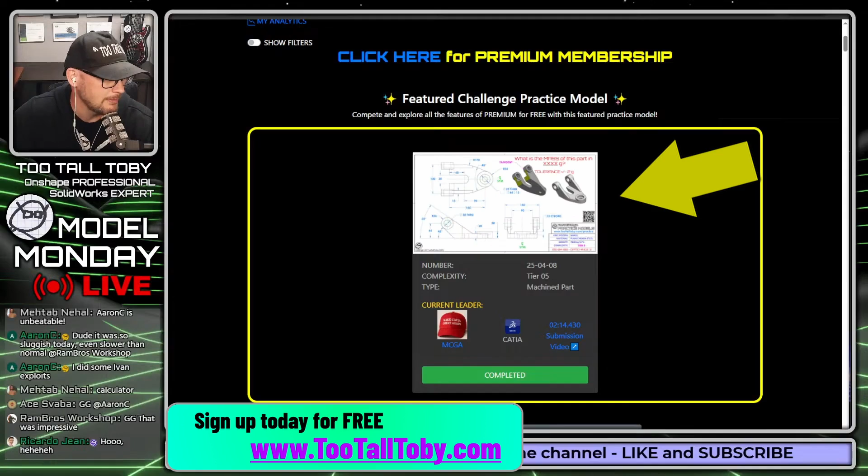You're going to see here we've got this featured practice model from last week. We posted this one. We made it a featured practice model for last week. Well, now we are going to refresh the page, and you should see a brand new featured practice model here, 250503. And so with the release of that brand new practice model, you guys are trying to solve this model on your own live. I am going to try and solve this model here for you as well using Onshape.

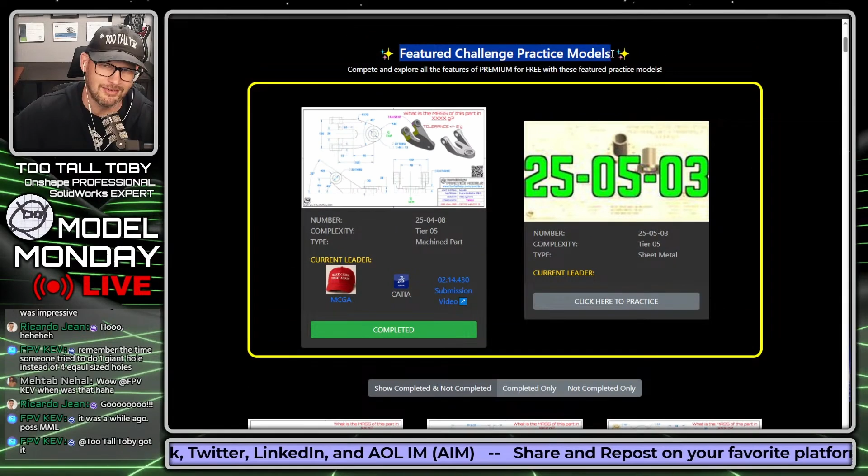And we're going to access this model by going to tootalltoby.com, saying click here to get started. And we're going to try and do this model right here. We just released it 10 seconds ago. 250503, and it's here in our featured challenge models. So these are models where all users, even if you have a free account at tootalltoby.com, can access the functionality of practice models premium.

So normally this model is gated, but today it is available for everyone, and it'll probably be up there for about a week. So we're going to say click here to practice, and no one has solved this thing yet because we just released it. So let's say click here to begin, and go.

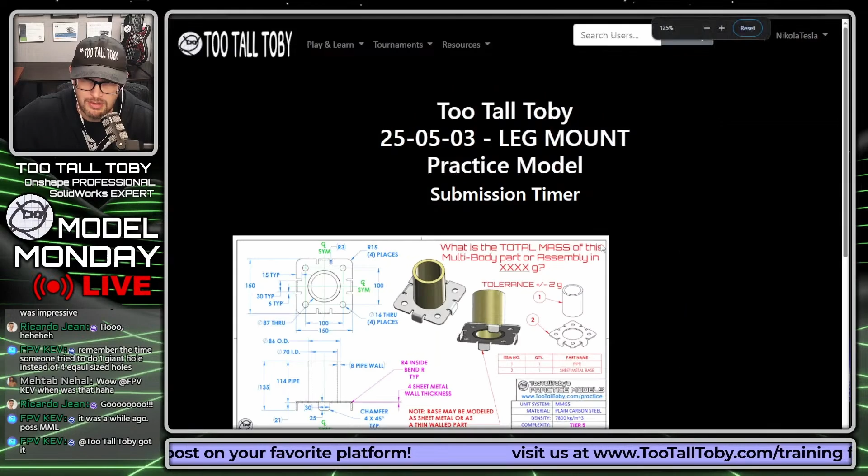So what is the mass of this multi-body part or assembly in XXXX grams? Tolerance is plus or minus 2 grams. So both of these parts are made from plain carbon steel. We can see the clock is running down here, but even though the clock is running, I think it's always good to start out by coming up with a game plan. So one of the first things you're going to do is you're just going to kind of get acclimated with the geometry of the drawing, right?

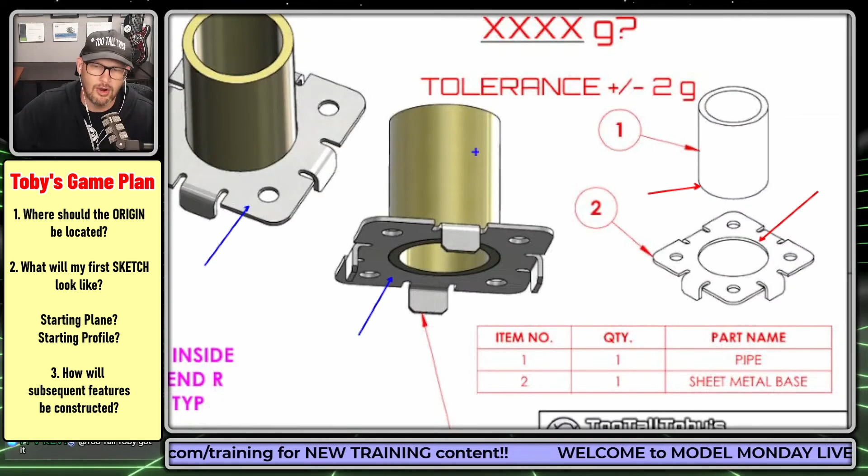If somebody from the shop gives you a drawing, or if a customer's got a new invention and they give you a drawing, you're going to have some questions like, when this pipe fits into this hole, are they the same size or are they different sizes? And is this pipe here flush to the top surface of the bracket, or is it flush to the bottom surface of the bracket? And are they made from the same material? Well, we already kind of answered that one. They are made from the same material. They're both made from plain carbon steel.

And maybe another question you'd have is, is this lower part sheet metal? Does it have to be sheet metal? Well, we can see here there's a note that says the base may be modeled as sheet metal, or it may be modeled as a thin-walled part, whatever you prefer. I'm going to do it as sheet metal in Onshape here.

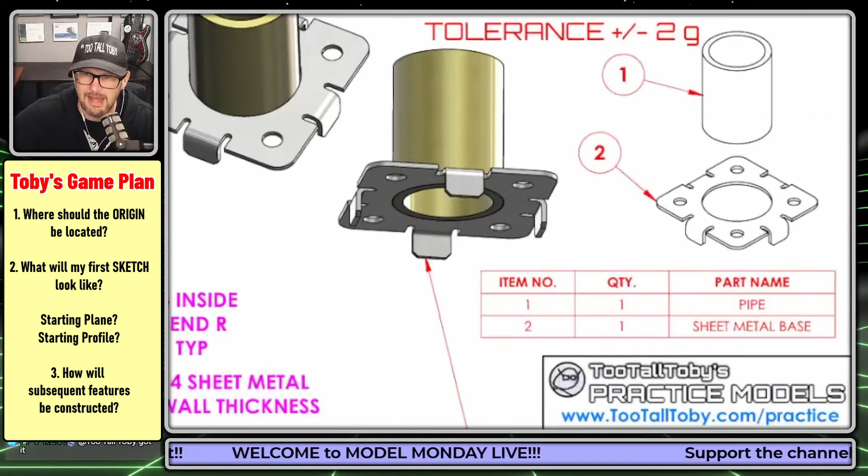So now, if we go back to this first question here, which is, is this diameter the same as this hole? Well, if we look here at the top view, we can see that there's a call out on the top view for the hole at 87 millimeters through. And then there's a call out for the pipe just below that at 86 outer diameter and 70 inner diameter. So now we know that there is a 0.5 millimeter clearance per side. So 1 millimeter total for that diameter clearance for that pipe to move through.

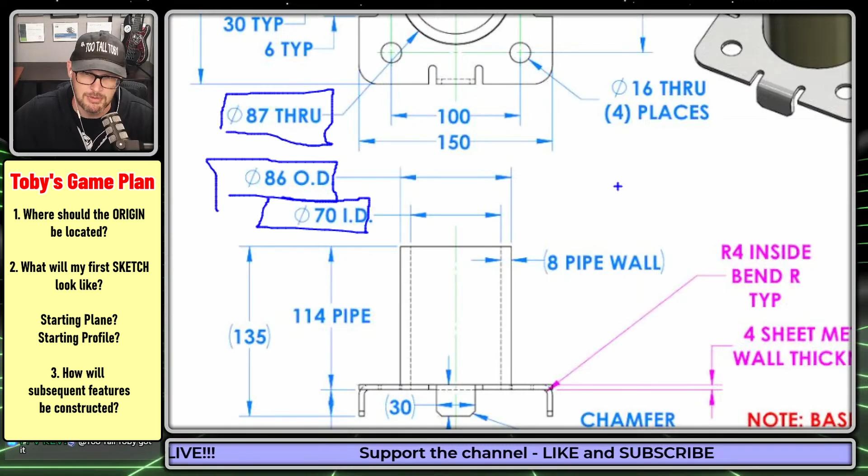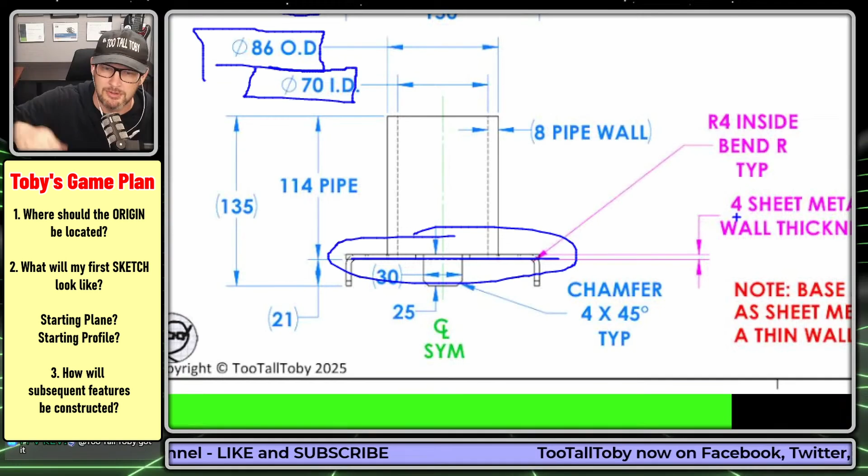And then is the pipe flush to this bottom face? I think it's safe to say that it is. You can see here that it looks like it's running up flush to that bottom face of the bracket. So not the top face, but flush to the bottom face. And then also, if we look here in this front view, we can see that there's no extra line happening down in this lower region here. It's like there's one single line that just kind of comes across straight there. So that's another indicator that that pipe is just moving down and ending up flush to that bottom surface.

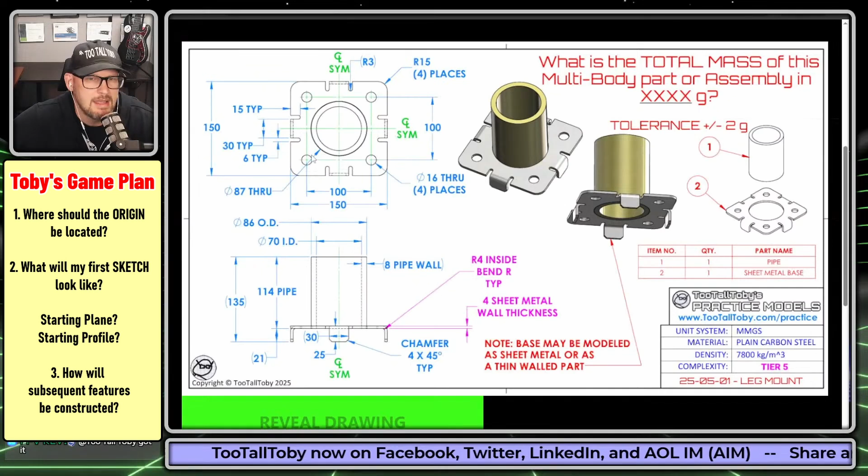So that acclimation has to take place whenever you're looking at a semi-complex drawing, a drawing of a multi-body part or a drawing of an assembly. Whenever you get a drawing from a customer, you just have to take a minute or two and kind of get acclimated with the geometry of the drawing. So now we can get into our actual game plan. And I think the game plan for this, for me, is going to be to create this kind of sheet metal part first, and then I'll create this pipe part second.

And so to create the sheet metal part, I think what I'll do is I'll create a rectangle here that's centered on the origin. So we're always thinking about what's our first sketch going to look like and where is our origin going to be. Maybe I'll include this hole that's running through, the diameter 87 hole here, in that first sketch as well. And that sketch is going to be 150 by 150.

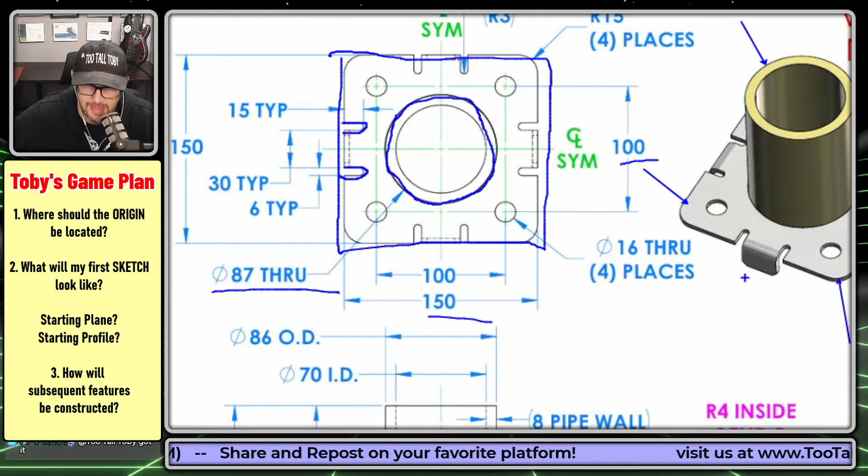And then I'll take that sketch and I'll turn it into sheet metal. I'll just make it sheet metal right away in Onshape. And then once I've got that geometry extruded as sheet metal, I'll go in and I'll create this shape here, this kind of like tombstone cut shape here, because that's going to give me the location of this flange that's sticking down here. So I'll make those cuts there.

And then once I make those cuts, then I can get in here and start creating the geometry of this flange. So we can see this flange is 30, we saw that in the top view, by 25. And it's got some chamfers here on the corner. And then once I've got that one single flange, well, then what I can do is a pattern.

This model is symmetric in two directions. It's a square base. So instead of doing this as a mirror of some sort, what I could do is a circular pattern. So we can take those cuts, and we can take that flange and we can make that into a circular pattern and just circular pattern that thing all the way around.

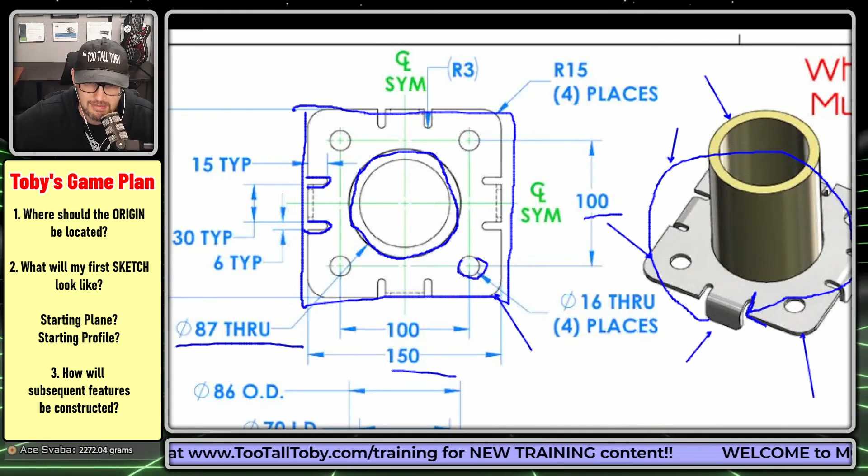And then once I've got that circular pattern, it's pretty much an easy finish there. All I've got to do is add these fillets, add these holes, and then extrude the pipe. And I'll make the pipe a separate part, and that should pretty much take care of it. So we took about 4 minutes there to come up with a game plan.

I see some people are coming into the chat with their answers. That's awesome. Maybe those answers are even going to start showing up in the top 100. And so we'll see that in a minute, but I'm going to save that. I don't want to spoil it for anybody.

So what I'm going to do is I'm going to jump into Onshape here. I'm using Onshape's free offering, onshape.com/free. And so that means that once I create this document, it will be created in the public space. And that means that anybody who wants to can go into the public space and search for this document name, and you'll be able to see the way that I constructed the tree here in Onshape.

Let's bring up our keyboard cam and let's get into modeling this thing. Create document, 25-05-01 leg mount, and this is in the public space, so anybody who accesses Onshape can search for this document. And we're going to go up here to this hamburger menu, and in that hamburger menu, we're going to make sure that we're using the correct workspace units.

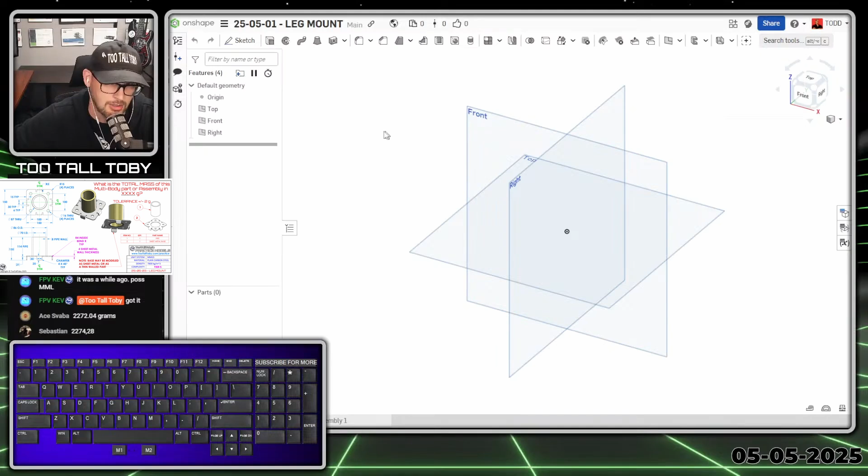So my default workspace units are millimeter. That's the units of this document. Grams, that's the units of this document. So I'm good to go here. Of course, if you want to change that, you can change that in your profile up here, your defaults, or you can change it per document using that hamburger menu.

And then I'm going to go top plane, begin a sketch, S key here, begin a sketch, N key to get normal to, S key, I'm going to go to sketch a rectangle. I'm going to single click here, I'm going to move my mouse, and then I'm going to hold Alt. So this is kind of a cool shortcut. When you hold Alt, what you can do is you can make a square instead of making a rectangle in Onshape.

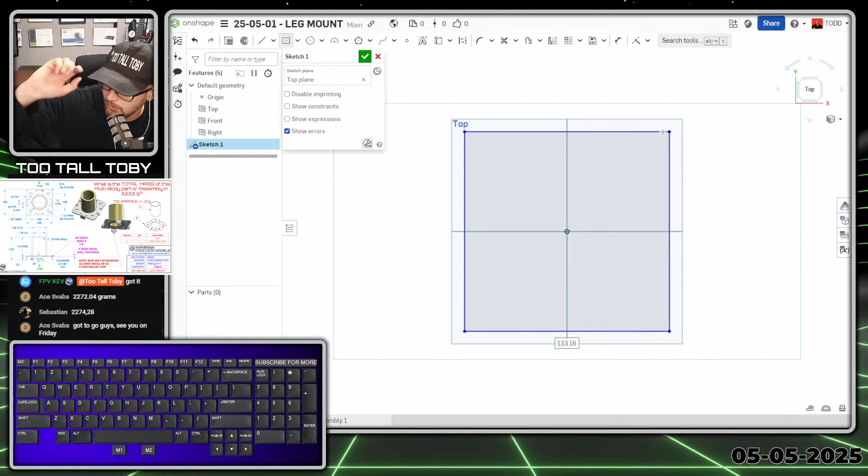So I'm holding the Alt key on my keyboard, then I'm going to click to drop that corner of the rectangle. Now I'll let go of Alt, and I'll type in 150, and look at that. That gives us a square instead of a rectangle. So now we are set up here with a square instead of a rectangle.

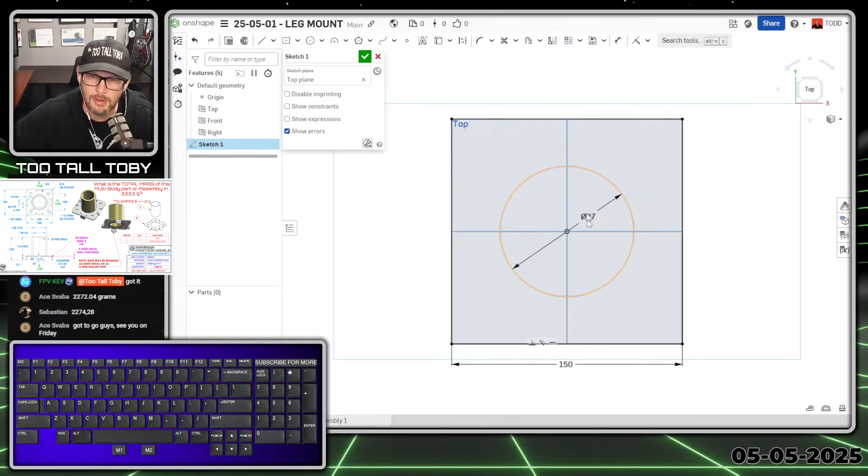Now we can press the S key, jump into the circle command, and we can create a circle here with a diameter of 87. The through hole in the sheet metal part is going to be 87 millimeters. And so now, whoops, I didn't mean to make that circle, just Control Z there. So this is what your first sketch should look like here. And now we're going to take that geometry, we're going to exit the sketch, and we're going to go into our Onshape sheet metal model tools.

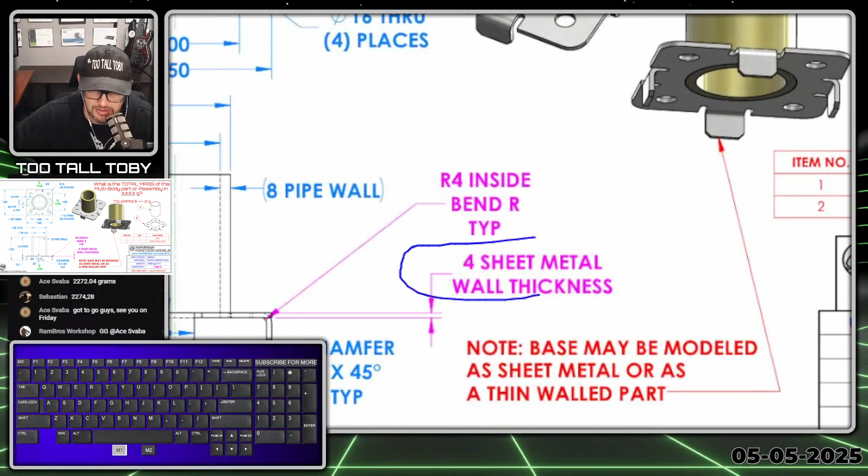And so here in our Onshape sheet metal model, we're going to say we want this to be a thicken, and then we can just pick here inside of this region, and that lets us thicken this into sheet metal. Now, if we go back and we look at the drawing, we can see here on the drawing that the default sheet metal wall thickness is 4 millimeters, and the default inside bend radius is 4 millimeters as well.

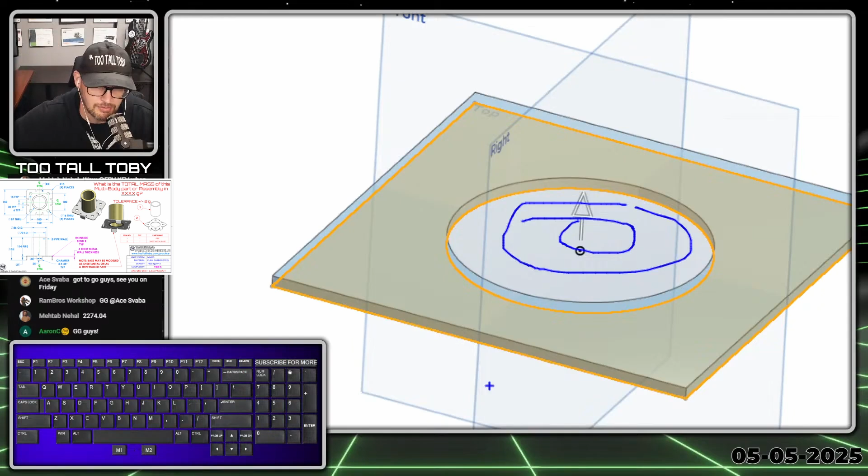So here in Onshape, we're going to make sure that we're using 4 millimeters for our wall thickness, 4 millimeters for our bend radius, and then this could either be going up or down. I think I'll just make this going up, and that way later on I can create the sketch for the pipe right here on the top plane. So it just makes it a little bit easier for me to make that sketch of the pipe later on. So 4 millimeters up here, 4 millimeters in this direction. I'm going to hit the green check mark, and there we go.

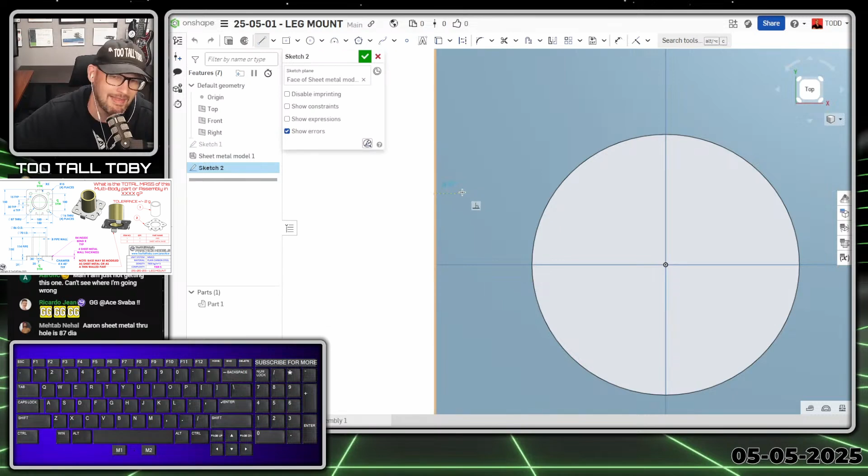And now I'm ready to move on to the second step in my game plan, which is to create those little slots on the side here. So S key, begin a sketch, N key, get normal to, S key, create a line. So I'll just do a line here. And we could do this with the slot tool, or we could click line, arc, line. Either one works. I like the slot tool here. So I'm just going to drop in a line, hit escape, click on that line, and then I'm going to go up here to where you've got the offset entities command in Onshape. You fly out this menu, and that's where you're going to find the slot command. So make this a slot here.

That's going to have a width of 6 millimeters. So 6, and then I'll just left click to finish that slot, and then I'm going to hit escape, and I'm going to right click on one of these lines in the slot, and I'm going to choose select tangent connected edges. So that gets everything in the slot, and then I'm going to click mirror, and then in Onshape where it says select a mirror line, I can just pick this plane here, the front plane, and I can just mirror right over that plane. So you don't actually have to sketch a line to mirror about. You can just mirror about that plane.

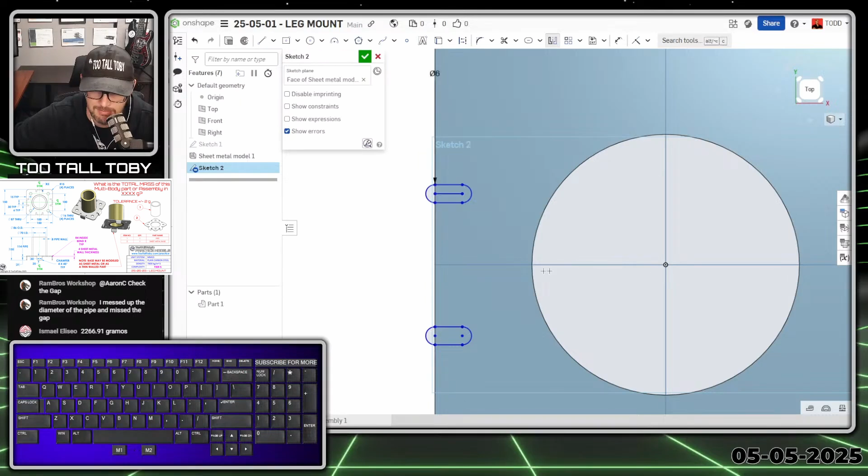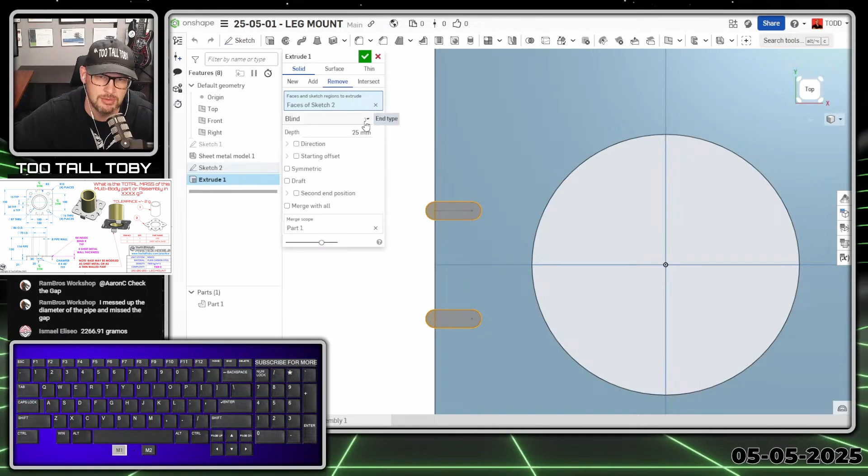And so now I can S key dimension and create a dimension here from line to line with a distance of 30. This is all shown in that top view. And then a distance here from this line to the arc, and that goes out to the max tangency point of the arc, and that's where that 15 dimension is shown. And so now I'm going to S key extrude, and this will be a remove, and that remove is going to go through all. And boom, there we go. That gives us that geometry.

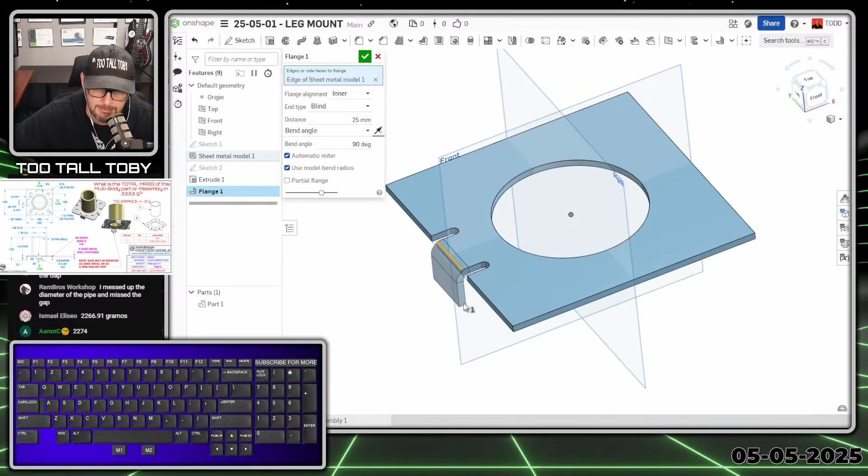And so now I'm ready to move on to the flange feature. So for the flange feature, I could just pick the flange command here, flange. So this is in the sheet metal fly out, all the sheet metal commands are here. So flange, and then I'll pick on this edge here, and you can see that I can reverse the direction of that flange. I can make sure that the flange is going down. It's going to be going down to a distance of 25, and then I'm just going to look at this thing in a front view.

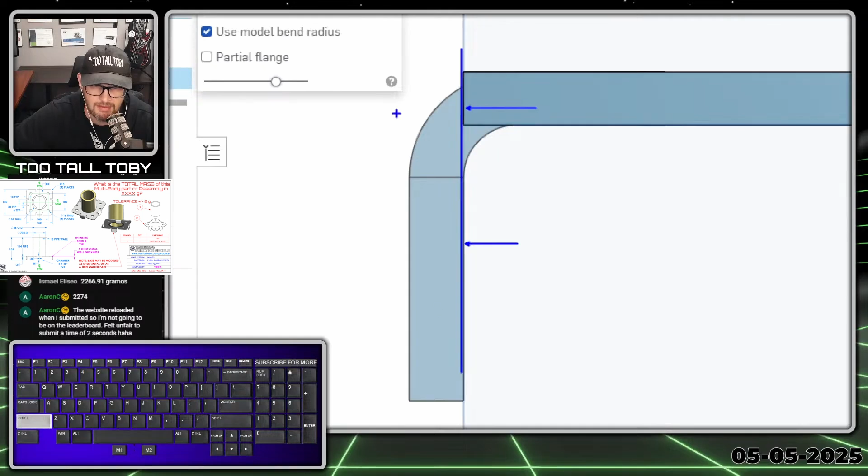So I'll press Shift 1, that rotates me into a front view, and you can see here that the edge of the part is coming down, and now we're ending up one material thickness to the outside of the edge of the part with this flange. So here's the edge of the part, here's the flange. Those two probably are flush, and then I've got one material thickness here to the outside. Well, if we look at the original drawing, that's not what we have. In the original drawing here in the front view, the edge of the part is flush to the flange.

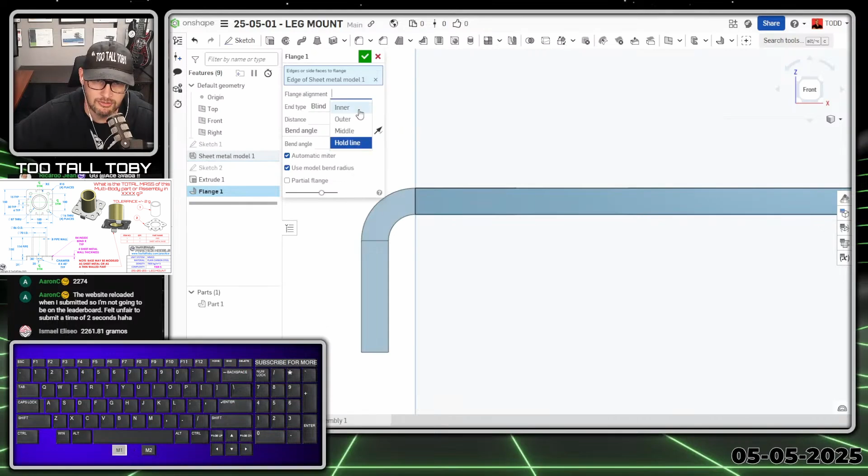So in any sheet metal module, whether you're using Onshape or SolidWorks or Fusion, you're going to see that there's going to be options to control where that flange ends up. So flange alignment inner, flange alignment outer, see, look, that one's flush, flange alignment hold line. You get all different results here. So for this one, we're going to say flange alignment outer. We're going to hit the green check mark, and then the distance from this face down to this face down here should be 25 millimeters.

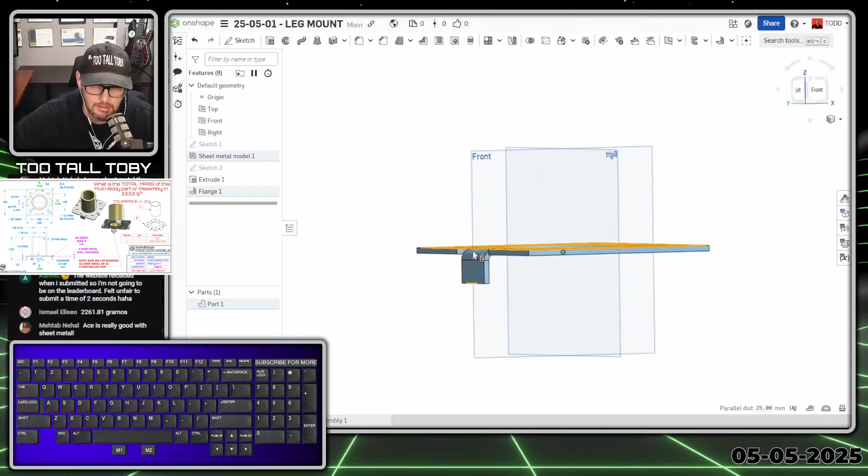And so if I just click on those two and then I look down here, you can see that that distance is 25 millimeters. So it's just a quick check to make sure that that distance is correct. So now that that check is complete, I'll click in the background so nothing is selected.

I'll choose the chamfer command. This chamfer is going to be a distance of 4 by 45, and that's going to be applied here on this edge, and here on this edge. So chamfer 4 by 45 on those two edges.

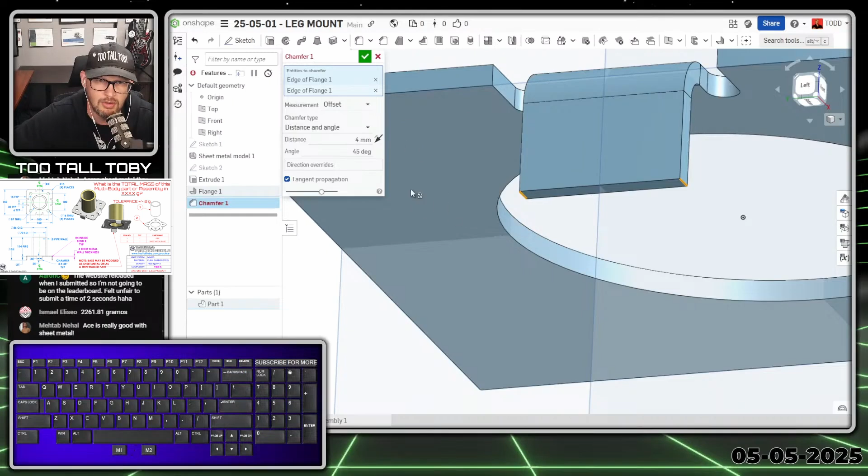Looks like I'm running into a little bit of an issue here where that chamfer doesn't seem to want to complete. So I think what I'll do here is I'll cancel out of that. I like this model because it lets us experiment with some things that maybe don't go as planned in Onshape. Instead of using the traditional chamfer there, what I could do is fly out this menu here, and from this menu, I could choose the option for corner break.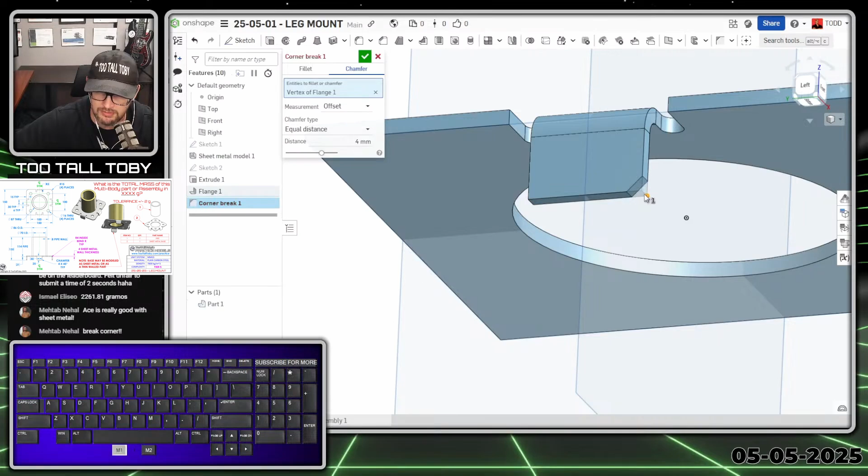So I'll choose the option for corner break here, and I can either make this a fillet or a chamfer. I'm going to make it a chamfer with an equal distance of 4 millimeters, and then I'm going to click on this edge here or this point, and this edge here or this point. And you can see that Onshape is able to break up those corners using that corner break option.

So in Onshape, when you're in sheet metal mode, you can get to the end of sheet metal mode and choose, here it is, finish sheet metal model. And once you do that, you're going to be able to access some of those more commonly used geometric commands. But while you're still in sheet metal model mode, some of those solid feature commands may or may not work. Like cut works fine, but chamfer maybe will give you a little bit of a hiccup. So instead, you can use the sheet metal tool for corner break, and that way you can generate that chamfer.

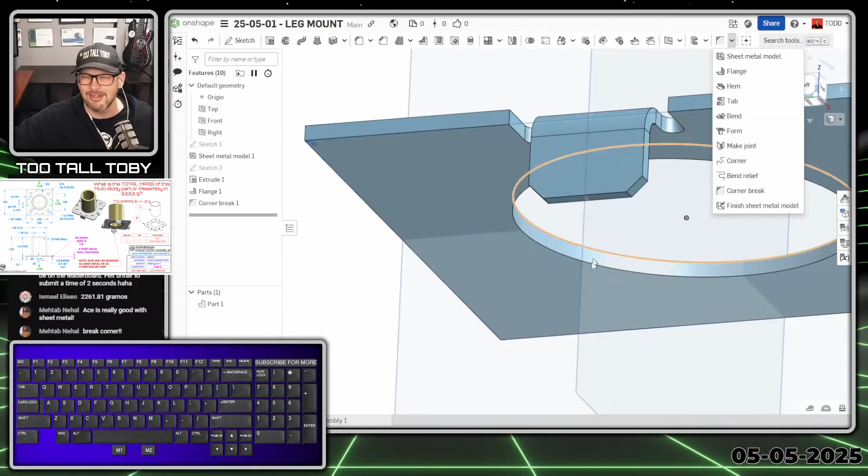So this is a great model because it helps us see some of those little hiccups we might run into, and it helps us experiment and work around those options.

Mehtab's showing that you can use a face when you do a corner break. Let's try that in Onshape. So I'll double click on the feature to edit it. I'll press the space bar in the background to clear selections, and then I'll just pick this face here. And nope, doesn't look like it's going to let me pick that face.

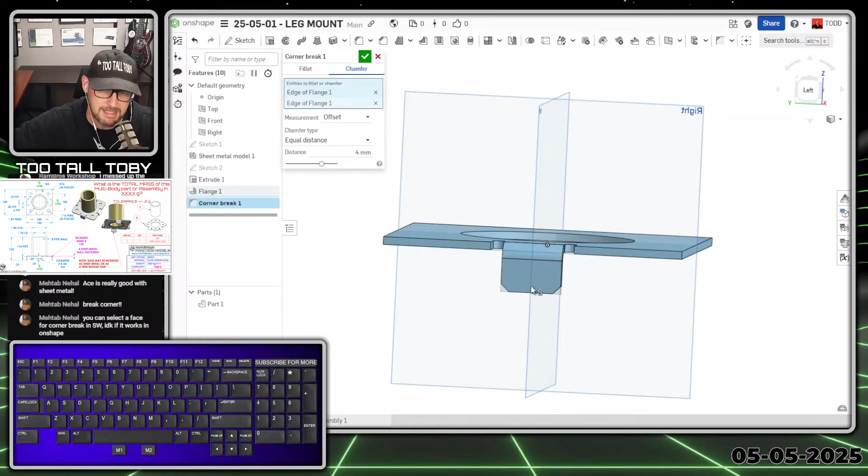How about a window select here? So I can do a window select and get both of those corners pretty easily. That's probably what I would use instead of just picking that face there. Yep, good call, Mehtab. So now that we've got those features in place, let's jump into our circular pattern.

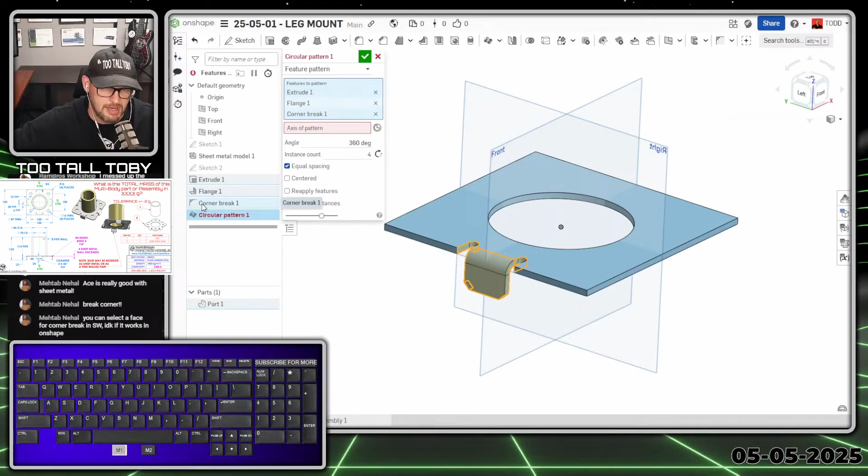So we go in here and we say circular pattern, and we're going to create a circular pattern of features. So here we go into features, and we're going to pattern the cut that we created, the flange, and the corner break. And then we're going to go to where it says axis of pattern, and we're going to pick this edge here of the circle. And we see that we sort of get a preview, but the preview is not coming up.

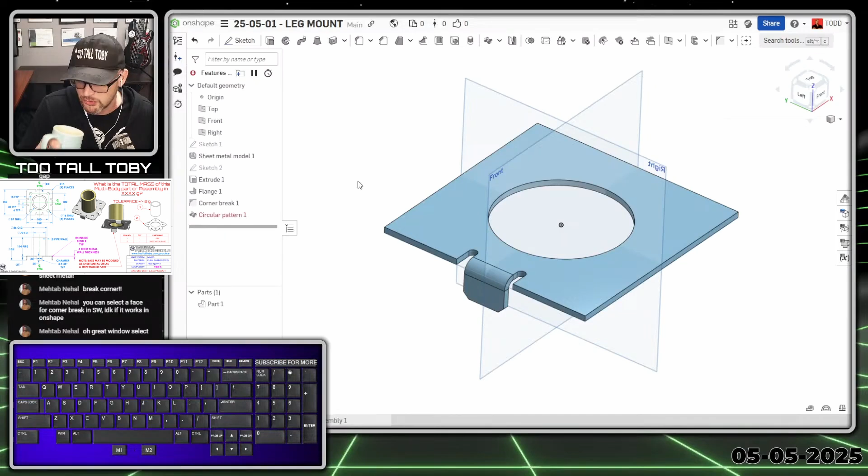Now, for me in Onshape, anytime I run into an issue where the preview shows up in red and I'm doing a pattern, the first thing I do is hit this option here for reapply features. And 9 times out of 10, that'll resolve the issue. But in this case, it's not resolving the issue. And this happens sometimes in any 3D CAD system where you try to do a pattern and it just doesn't work. You can't seem to feature pattern.

Now, the reason why you cannot feature pattern depends on the CAD system that you're using. It could be because of how different features are coming together. It could be because of edge IDs, face IDs. It could be for a variety of reasons.

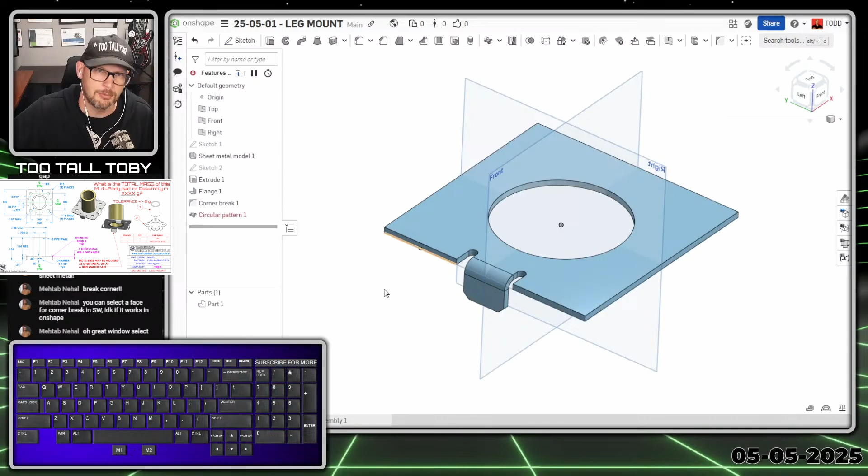But again, the reason I like this challenge and the reason I was excited to live solve this one is because we get to show you some workarounds when you run into an issue like this. And the most common workaround when a circular pattern of features doesn't work is to instead do a circular pattern of a body. So if I click here on the circular pattern for the feature, I'm going to delete it.

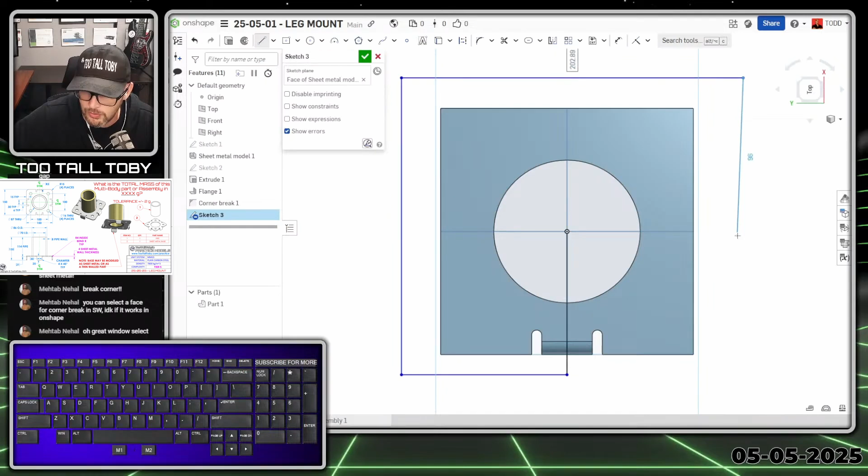And then I'm going to click on this face here and I'm going to go S key, sketch, N key to get normal to. And then I'm just going to create some geometry to kind of cut away 3/4 of the model. So I'm going to create some geometry that looks like this. And I'm just going to cut away 3/4 of the model here using an extrude. So I'll do extrude here and I'll do remove and I'll make that through all, kind of cut away 3/4 of the model here from that top surface.

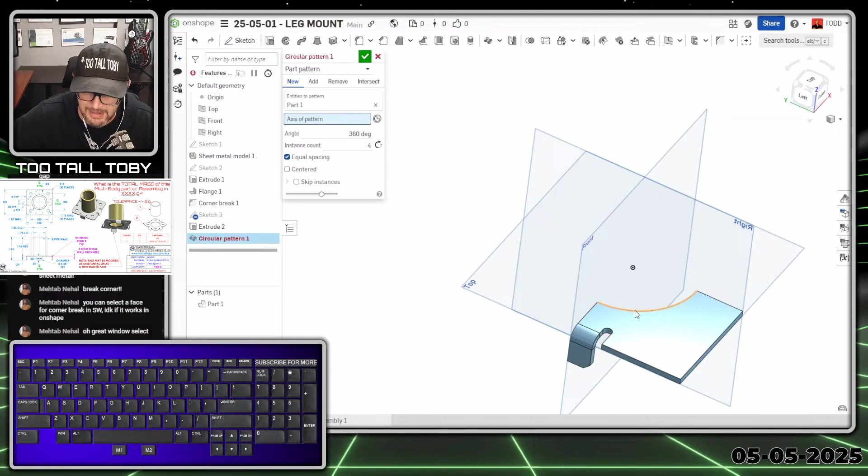And then what I can do is I can do a circular pattern. And when I go to do the circular pattern, I'm going to say that I want to pattern the entire part. Instead of features, I want to pattern the entire part. So I pick the part here and then for my axis of pattern, I'm going to pick this edge here. And well, at least I'm seeing a preview, but not quite what I wanted. Not quite what I was hoping for. I'm ending up with only half of that tab there. So what did I do wrong?

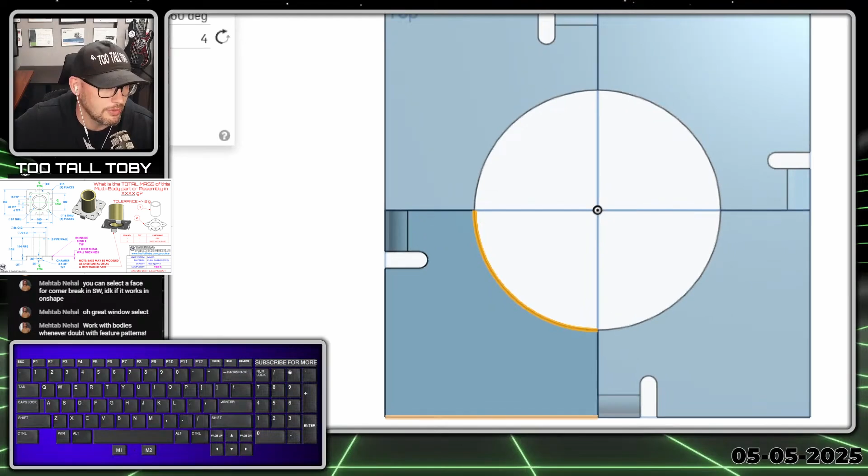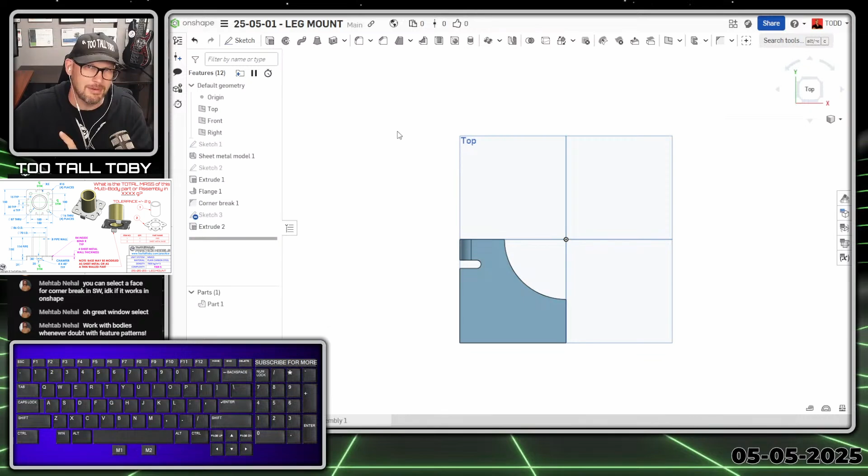Well, what I did wrong here, and this is again why I really like showing this model in the live solve, is a lot of times you think, okay, I'll just cut it into 1/4 and then I'll pattern that 1/4. But the thing is, we want to cut it here. We want to cut it like this, because we want to basically keep everything along this edge. And then we just want to make a pattern of that in the 4 locations. So I like this model. This model is a cool example because it reminds us of a lot of different lessons. When a feature pattern doesn't work, you could try and do it as a body pattern. But remember to think about what exactly it is that you're trying to pattern.

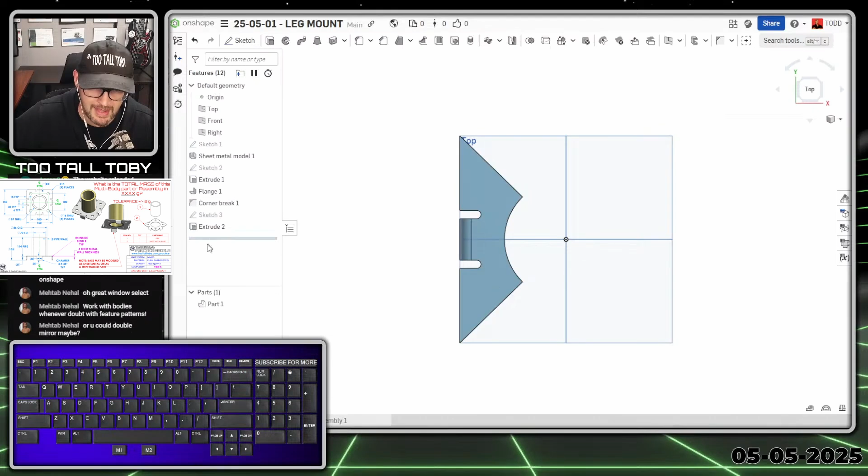So if I go back here to this sketch, I'll just delete the whole sketch and recreate it. Instead of creating it the way I did, I could start here at this corner, come down here to the middle, come down to this corner, over to this corner, up and over. And then I can choose to remove all of that geometry. So I'm doing that cut. Here you see what that cut looks like. I'm cutting away 3/4 of the model, but off of a 45-degree angle and then a 90-degree angle. And the reason that 90-degree angle works is because it's a square. I started with a square, so it works in this case. If you didn't have a square, this might not work as clean.

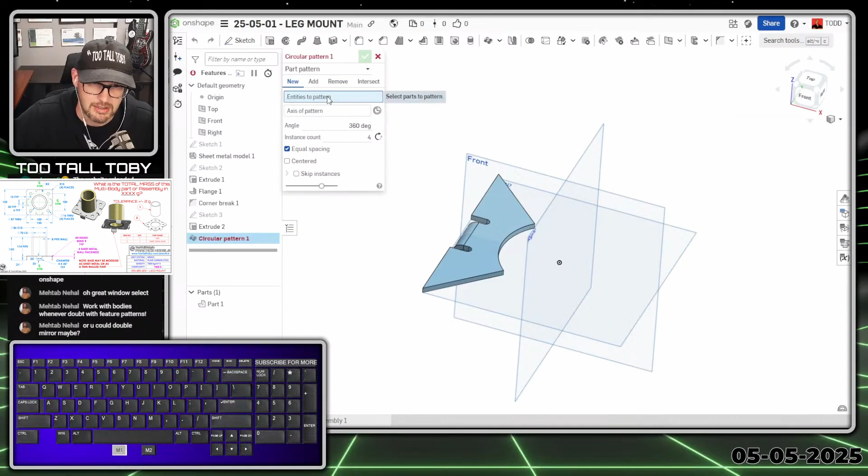But now I can go into my circular pattern. I can say I want to create a pattern of the entire part. So part pattern here. Here's what I want to pattern. And then for my axis of pattern, I'm going to choose this edge right here. And look at that. That's looking pretty darn good. I'm going to say that I want that to be an add so that the sheet metal model is merged together. Hit the check mark. And there we go. There's our sheet metal model.

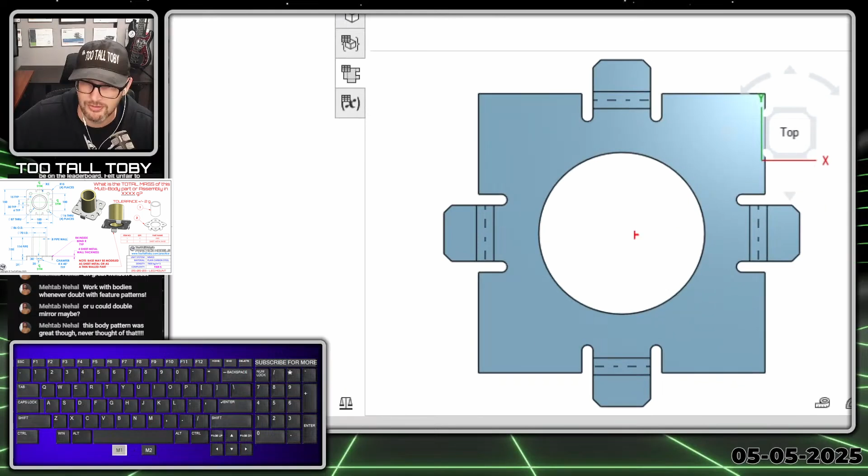If we go over here in Onshape to our sheet metal tab, you can see that it shows us a flat pattern. That flat pattern looks exactly like what I was expecting. So the circular pattern worked. The flat pattern looks good. This is all looking good here. This is exactly what we were hoping for. And so now we can go in and just add the final features.

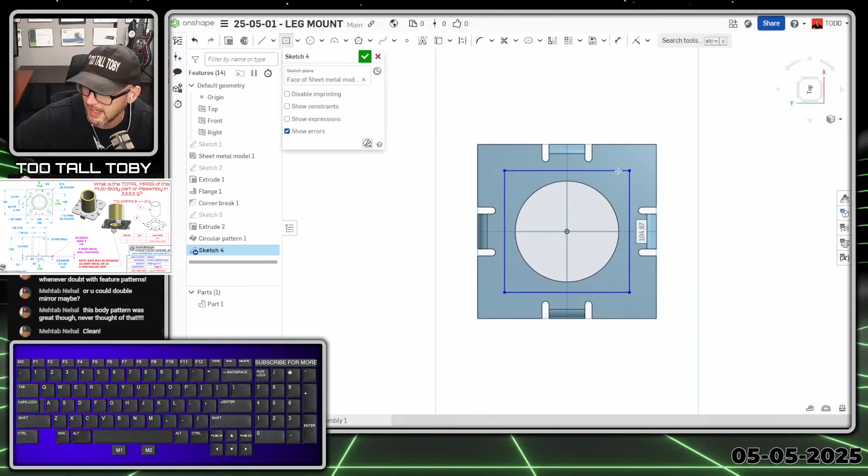So we could S key here. Maybe what I'll do is make a sketch here. So pick this face, S key, begin a sketch, N key, get normal to, S key, begin a rectangle. Single click here, move my mouse, hold Alt, because Alt is going to give me a square instead of a rectangle. Then single click out here, let go of Alt, and I'm going to type in 100 because that's supposed to be the location of my holes. And then when it comes to creating those holes, this is a little trick I learned from the chat a few weeks ago.

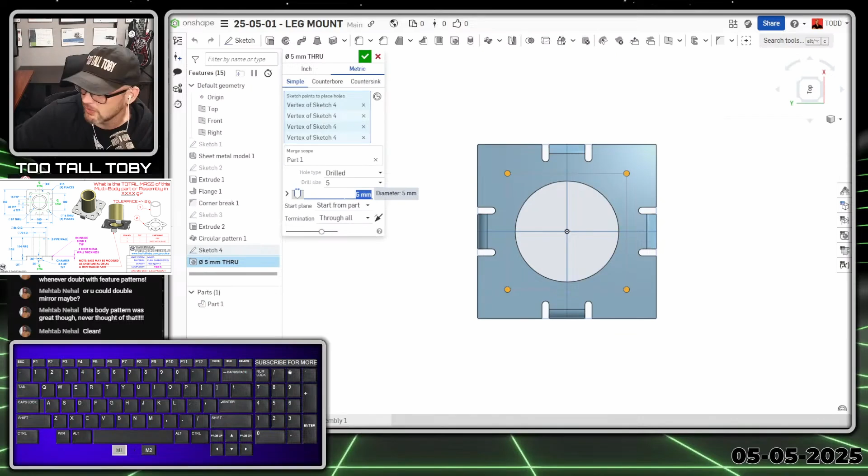I can exit that sketch. I can just click on the rectangle, just click on that sketch 4 there in the tree, so it's highlighted, and then I can come over here and click the hole command, and look at that. Onshape automatically adds holes at the 4 corners of that rectangle. Yes, I like it. So this is going to be a simple hole, and the diameter of this hole is going to be 16, enter, and enter, and oh yeah, that looks great.

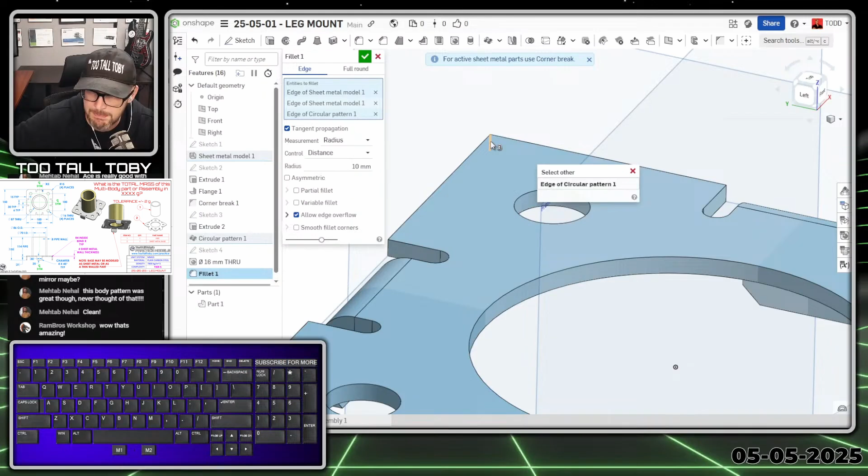And so now the final thing that we have to add is our fillet. So we go S key, fillet, we pick on this edge, this edge, this edge. And then for this one, I'm going to use the tilde key, this key up here kind of above the tab key on your keyboard. So you see how I can just take my mouse out here, kind of put my mouse over the area where I think that edge is, and then I can tap this key, and it lets me pick right through the model and pick that edge so I don't have to rotate the model.

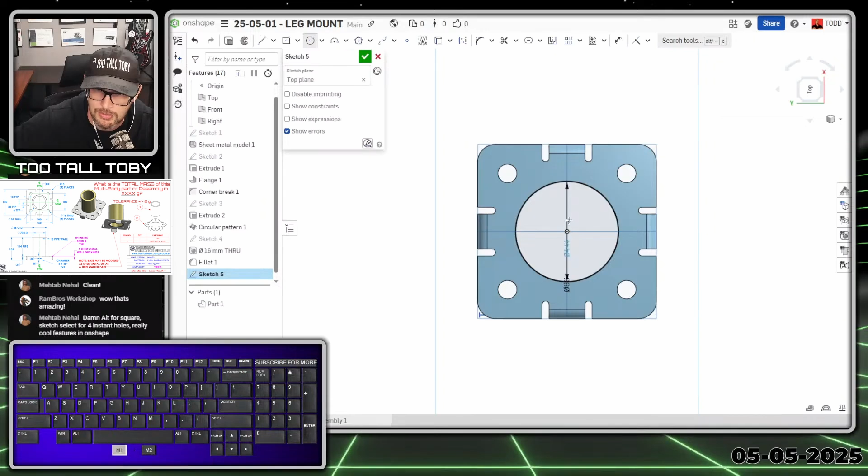And those fillets are going to be 15 millimeters. The hole is 16. The fillets are 15. And there we go. That's our base. So now all that's left is our pipe, which is going to be very simple. Top plane, S key, begin a sketch, N key to get normal to, S key to sketch a circle, single click here, move your mouse, single click. That circle is going to be 86, enter, single click, move your mouse, single click again. That circle is going to be 70, enter.

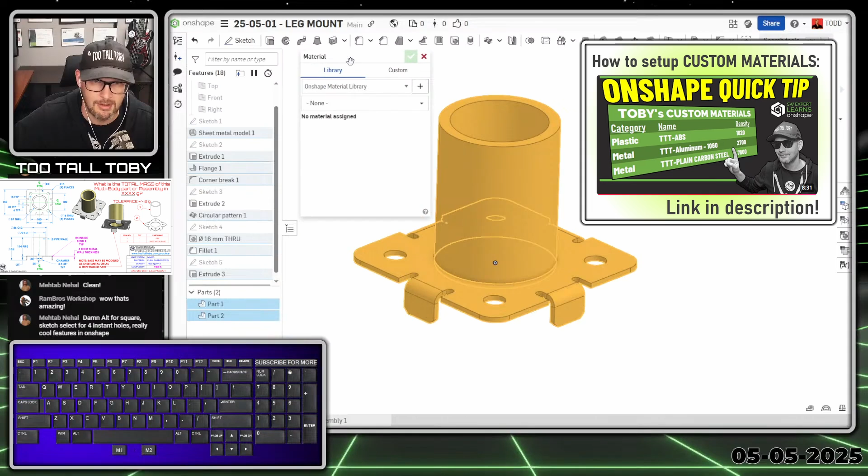And now we're ready to take that geometry and S key extrude, and that is going to come up to a height of 114. 114 for the height of that pipe. And look at that. That is looking good. We can press the P key to hide our planes. We can come over here, pick part 1 and part 2 from the parts list, right click, and we can say assign material for 2 parts. And this material is going to come from the custom Too Tall Toby materials library, and we're going to go down here to plain carbon steel.

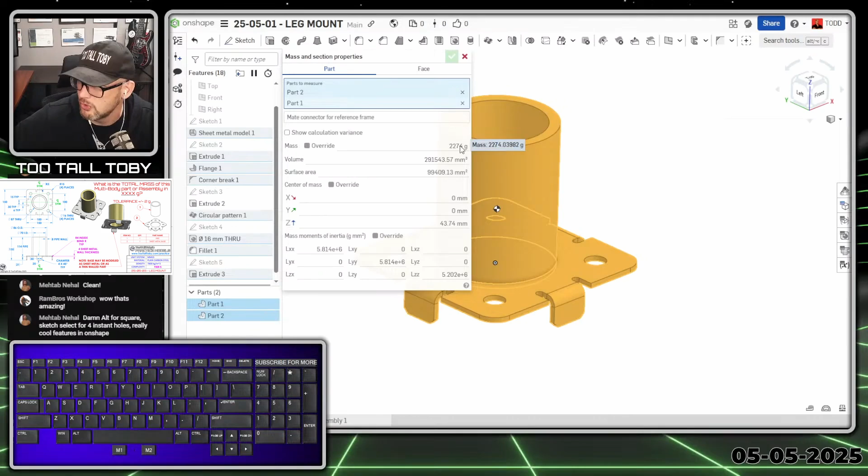We're going to hit the green check mark, and then we're going to come over here to the lower right corner. There's this icon, looks kind of like a set of scales. That's your mass properties icon. We pick this body, and we are coming up with a mass here of 2274. So we're going to go back into the Too Tall Toby app here. The clock is running. We've been going for about 19 minutes now. So let's give this thing a shot. 2274, enter, and oh yeah, we did it. We got it correct. So 2274 is the correct answer, 19 minutes and 19 seconds.

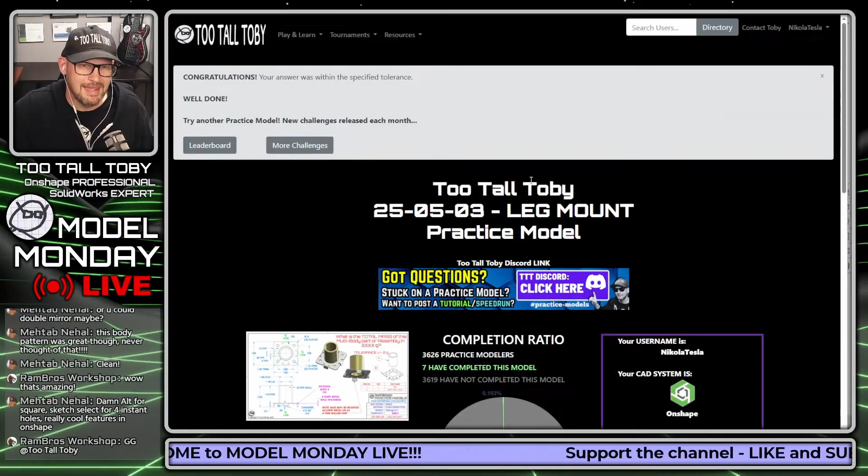And upon submission, your time of 19 minutes and 19 seconds will be awarded 1 point on the community scoreboard. So we say submit, and congratulations, your answer was within the specified tolerance. So because this is Practice Models Premium, or at least a preview of it, we could try again and see if we could do it any faster. We can also now click on the top 100 and we can see who was the fastest person to finish this model. And check it out.

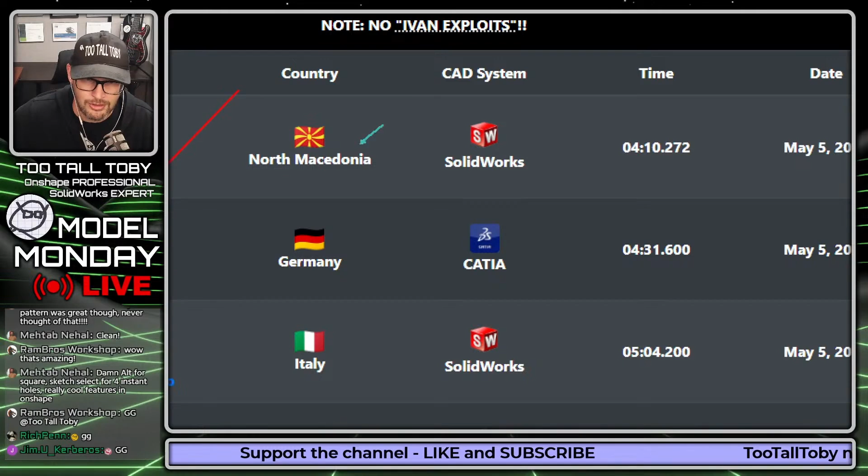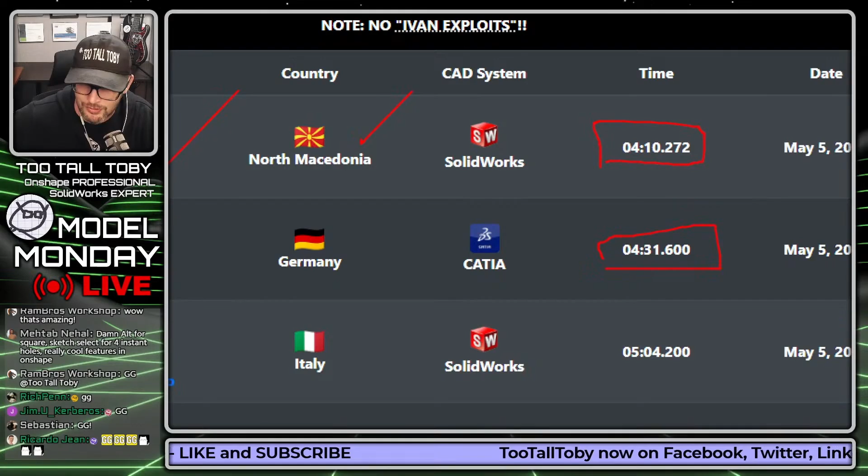It is none other than Otse, North Macedonia, with 4:10 as his time. Wow, wow, wow. It took me 19 minutes. It took Otse 4 minutes and 10 seconds. It took MCGA 4 minutes and 31 seconds, having never seen that model before. That is absolutely screaming. We're going to see Otse competing this Friday in the tournament. We're going to see Ricardo Salado competing this Friday in the tournament, 5 minutes and 4 seconds. Wow. We're going to see Mehtab again. We saw him last week, 6 minutes and 20 seconds.

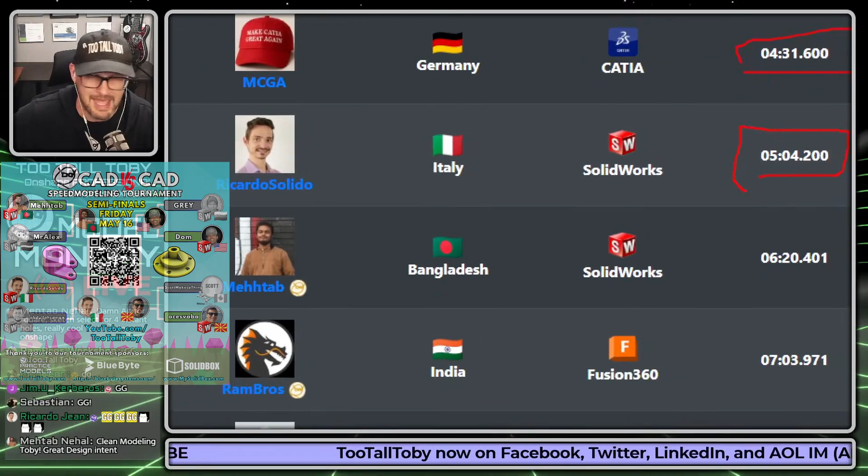We got RamBros Workshop, the world champion of 3D CAD speed modeling, in here with a time of 7 minutes and 3 seconds. Very, very impressive. We got Isaiah here coming in with 15 minutes and 19 seconds. And then, of course, we've got Nikola Tesla bringing up the rear here, 19 minutes and 19 seconds. So congratulations to Otse getting that answer correct and getting the fastest time on our top 100 leaderboard. Well done, my friend. And that's going to earn you a point on the Model Monday